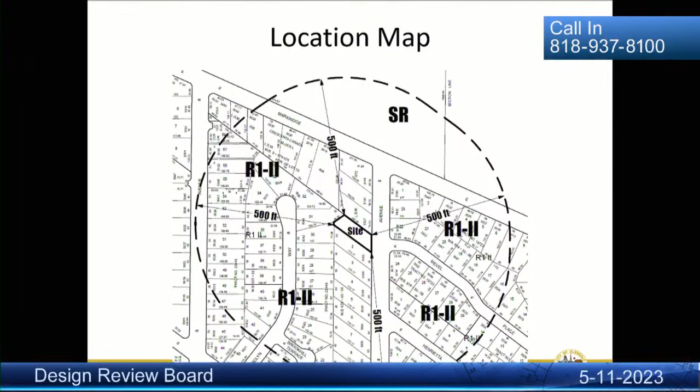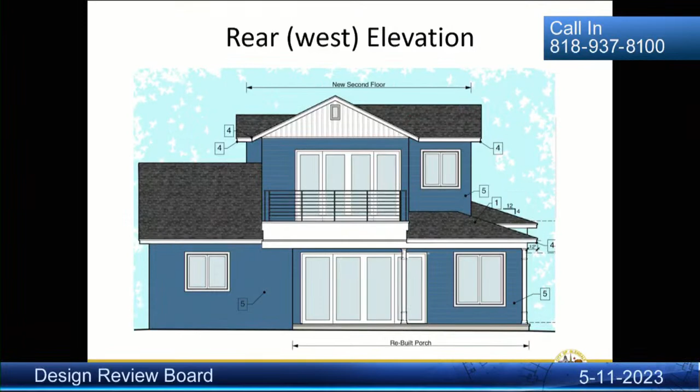Okay. The front elevation of the house, looking from Dunsmore, you can see the garage sort of outlined. The rear elevation and the two side elevations, the north elevation and the south elevation. And again, on this elevation, you can see the garage outlined. It is not being touched as a result of the project.

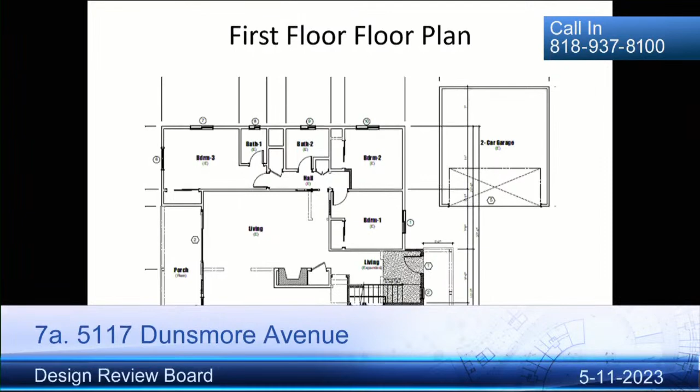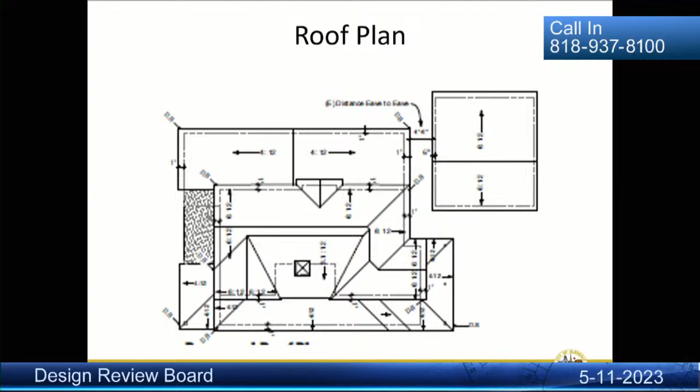A rendering of the proposed design. The floor plan. This floor plan, the darkened area is the square footage addition on the first floor. So you can see they're adding to their entry, they're adding some space for stairs and then a laundry room. This is the new second floor. Roof plan. Garage elevations, again, this is not being touched.

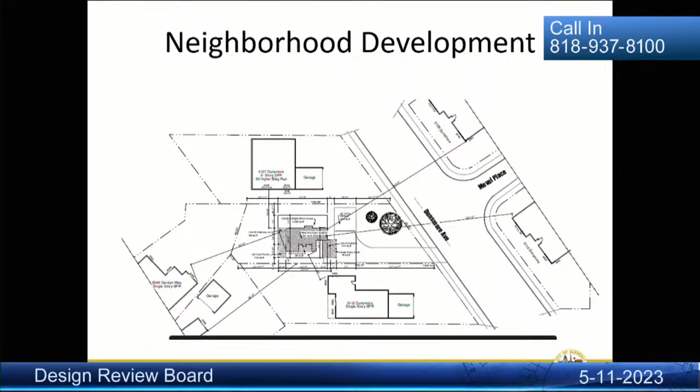Some section drawings. This is sort of the proposed residence in the center, and then the surrounding development, the surrounding houses are off above and below and to the side. So this gives you kind of a relationship. Material board, and then we have some conditions. So let me step back to the front of the PowerPoint.

The site planning of the project is acceptable. The addition really does not change the site planning in any significant manner. The side-loaded garage, as I mentioned before, is not being touched. There is a small addition at the front which expands the entryway and allows for the staircase to the proposed second floor. But really, other than that, the site planning is similar to what's existing now.

I would like to call out a correction in the staff report. Staff proposed initially a condition to remove or modify the existing wall and fence, which is located along the south property line. And this needed to be removed or modified to comply with zoning standards. However, there is a note called out on the plans that said this wall/fence will be removed. So that condition is no longer needed.

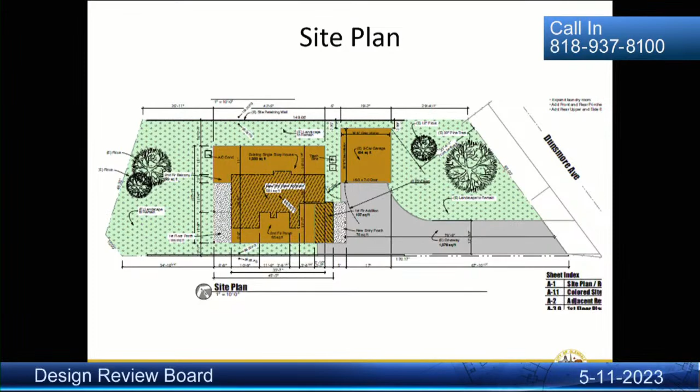So similarly, the mass and scale of the project is appropriate. Again, this is the front elevation. The site already contains a graded pad, and there are no changes to the size of this pad. While the neighborhood contains primarily one-story homes, and you can see that in the neighborhood survey, the proposed addition to the subject residence is really set in from the first level, and you can see that on the elevation pretty clearly. And also, the house is really set back from the street. The garage, as I mentioned before, is between the street and the house. Finally, the proposed covered porch highlights the front entry to the home without making it monumental.

Staff is suggesting a couple changes to the design and detailing of the residence. At the covered porch, the proposed columns appear a little bit spindly, and staff is recommending the addition of a fourth column or beefing up the columns that are proposed to make them appear like they are providing more support for the roof element.

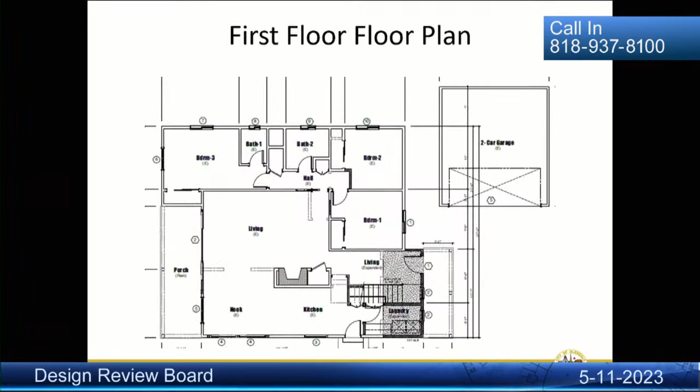Additionally, staff is recommending reducing the sizes of the proposed balcony and porch accessed off the primary bedroom to less than 25 square feet and/or requiring landscaping to be installed adjacent to those areas to provide some buffering to adjacent neighbors. And let me scroll down to the second floor plan, so that you all can see what I'm talking about.

There is a proposed balcony to the west, and there's a proposed porch to the south. Both are over 25 square feet, and as you know, city standards require us to look at privacy concerns with balconies and porches over 25 square feet. So we have suggested a condition either to reduce the sizes of those features or add landscaping, which would allow some buffering and some privacy for adjacent neighbors.

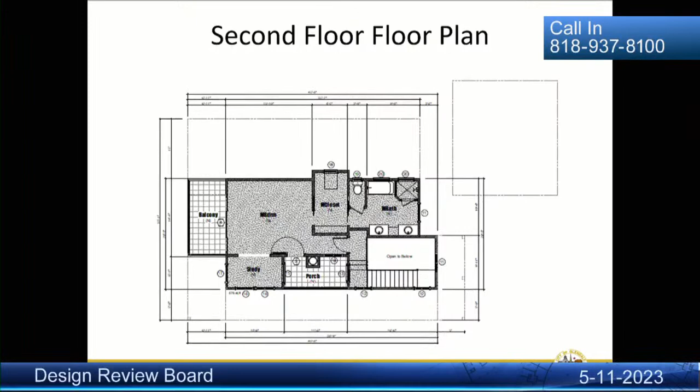We did receive one letter expressing some view concerns. I think that was forwarded to you. The gentleman was basically supportive of the project, but more concerned that the city didn't really have view protection. Additionally, the applicant recently submitted plans with neighborhood signatures that are in support of the project. So I'll hand those over to you, but other than that, that concludes my presentation. Staff is recommending approval of the project with 3 conditions contained in the staff report, and as I said earlier, we can eliminate the 3rd condition regarding the fence wall.

Great, thank you. Mr. Kiesel, do we have any questions? Yes, Mr. Keiser, can you leave up the rendering as we go through deliberation? Sure. Thank you.

Thank you. Any other questions for staff? Yeah, I had another question. So just to be clear, because I don't see it in the conditions in the staff report, but you said that there should be a condition about privacy, reducing the balcony sizes or adding privacy. Condition 2 suggests, and I'll just read it, the second floor balcony and porch shall be reduced in size to less than 25 square feet.

That's not what I see. That's not in our... Did we do? No. Okay. I apologize for that. What we sometimes do with potential privacy is just, I'll bring it to your attention. And often, if you don't hear from any neighbors, we think maybe there isn't an issue, but if you thought there was, you might propose buffering or something. Okay, all right. I just wanted clarification on that. So, yeah, okay. I'm sorry about that. Actually, you have the correct conditions in your staff report.

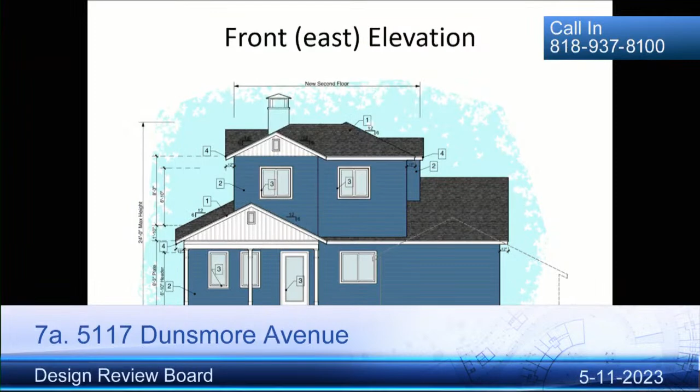That is, I believe that is just the remainder, one second. Just from a balanced design perspective, it just seemed a little thin to me. That's all I'm saying. It was actually my way of breaking the facade at that point, the stacking. I understand. If it bothers you, we could take it out, but it was my intent of breaking the vertical plane.

All right. I just wanted to ask if you'd considered it. Yeah, okay. I think it's so far back and it's behind the garage that it was more important to me to make it feel like it had always been a two-story. Yeah, okay. Thank you.

Okay, any other questions for Mr. Giragos? Nope. Okay, thank you, Mr. Giragos. We have no other cards here for this case. Do we have any callers? We have one caller. Okay. Or did you want to speak? No.

Mr. Michael Weber, you're live on the air with the Design Review Board. Yeah, thank you very much. Michael Webster. Oh, I'm sorry. Thank you for reading my letter. Just a point of clarification: we have dear neighbors, we do support their desire to build, and they do need to expand for their family. A comment was made that we supported the project. In my letter, I didn't support nor oppose the project.

Want to be clear. I was disappointed with the comments of the architect that the neighbor to the south has impact, but really the neighbor to the north does have impact on the view, and really gets to the fact that Glendale has completely inadequate view laws. But it is what it is, and we just wanted to make sure we were heard. Thank you. Do you have any other comments? That concludes my comment. Thank you.

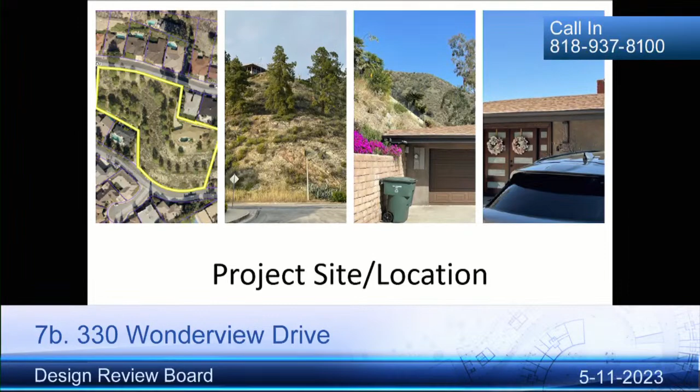I tried to consolidate so I don't have that many slides, just to work quickly through the presentation and have the opportunity for the applicant and the public to speak. So I'll go quickly. I've already described a little bit of the site in terms of its size, the zone, frontages on Wonderview Drive and Maginn Drive. Maginn is at the bottom of the site, but it is considered a dual frontage.

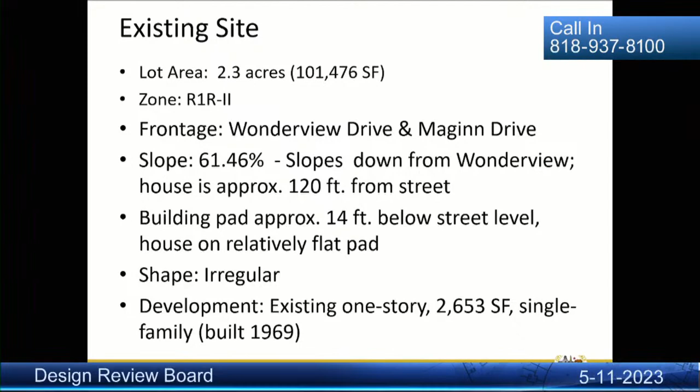We've talked about the average current slope, and how it slopes down from Wonderview Drive, approximately 120 feet from the street. The building pad is approximately 14 feet below street level, and the house is on a relatively flat pad, and we discussed the existing single-family house. The project proposal is to demolish the existing house. They're proposing a new two-story, 5,919 square foot single-family house with a three-car attached garage.

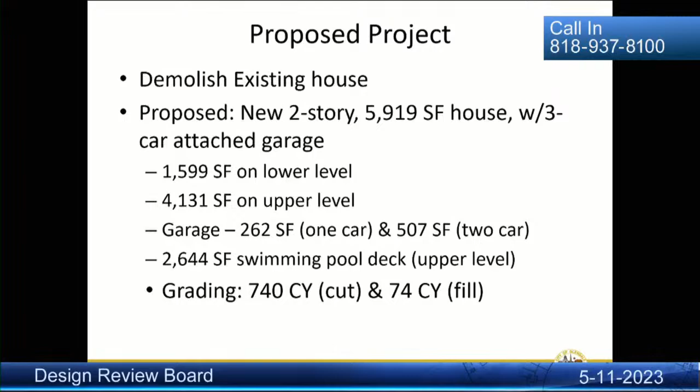The lower level will have approximately 1,599 square feet, and the upper level will be approximately 4,100 square feet. The garage is divided into a one-car and then a two-car, both attached. And there is a swimming pool deck proposed on the upper level, approximately 2,600 square feet, and they are proposing to grade 740 cubic yards of cut and 74 cubic yards of fill.

Project is exempt from CEQA review. It involves the new construction of a new house, and the existing house is not eligible for designation as a historic resource. In terms of context, the house has this long driveway, approximately 100 feet deep from the street, from Wonderview Drive, and slopes towards the south. And there are two single-family homes, one-story development directly in front of the subject site, adjacent to the property.

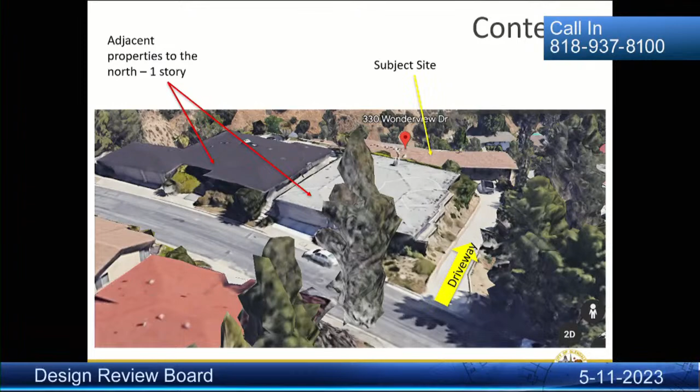And this is another view. Aerial views are probably the best view to capture the context. This image here, again, shows the existing house. It has the motor court and the swimming pool in the back, and then it slopes down. And then the rear of the property is where the pool is on the other image, and then the homes directly in front of the subject site.

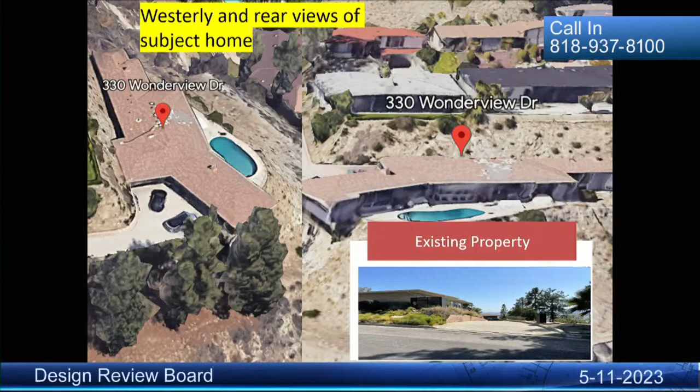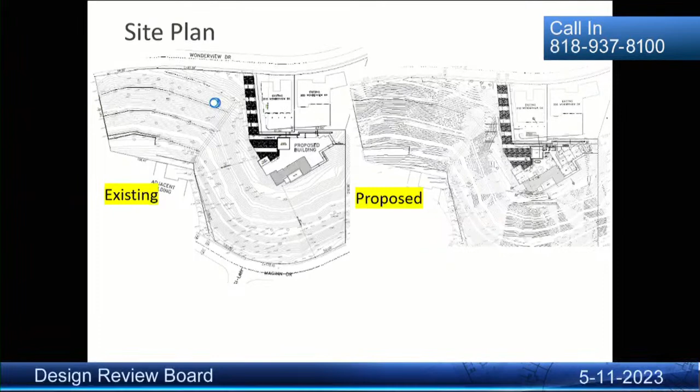And then the lower picture represents the image viewed from the street. So you'll have a glimpse of the existing house. And then the remainder just to the right of the property is part of the subject site, which has quite a large frontage. Again, the site plan is basically what I just described, so I won't go into too much detail on that. And the floor plans with the roof plan.

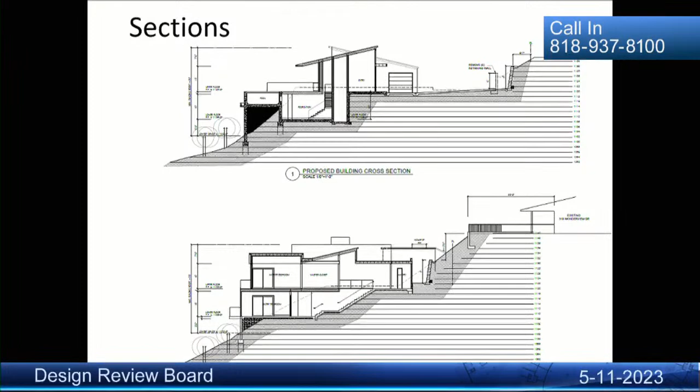Let me continue moving on to the next image. Again, more sections of the building. And the overall height is 2 stories and 35 feet, in case I haven't mentioned that before. Another thing regarding site planning, and let me go to that image real quick. We're suggesting condition number 2 to reduce the width of the driveway as much as possible while still in compliance with the 10-foot minimum width required by the zoning code.

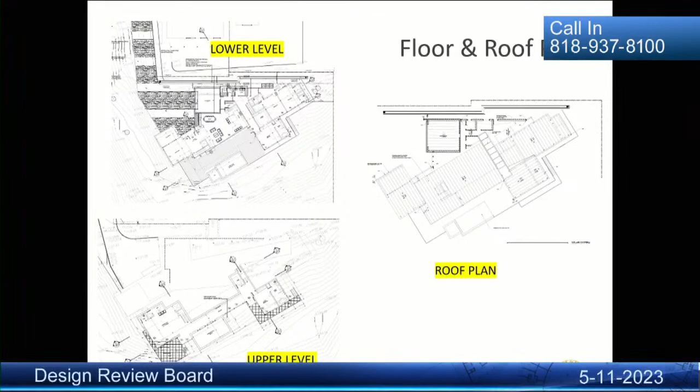Again, in its current form, it seems a pretty subtle driveway. It seems to flow nicely. Continuing that same thing, we believe, would be appropriate. In addition to that, if their intent is to enhance the existing design of the driveway, that's certainly something that would work well. But rather than increasing the width, we suggest that reducing it to approximately 10 feet would be more appropriate. And again, we'd like to reduce the amount of paving as much as possible.

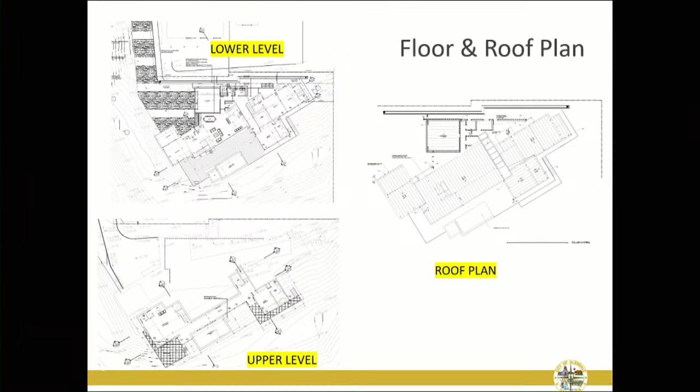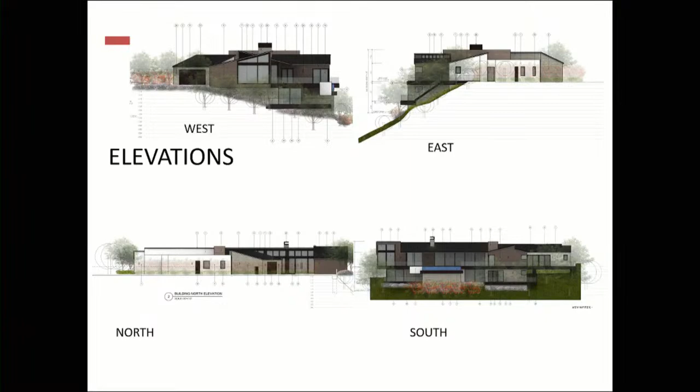These are some renderings or image elevations of what the house would look like. So there is some visibility, but not too much visibility from Wonderview. As you continue on Wonderview across the bend, of course, you will see the house more from a distance. And then from the street below, there will be some visibility, but quite a ways, more than 100 feet away. And these are some renderings of the front entry and the rear view of the house as proposed, and the color, materials and finishes that the applicant is requesting.

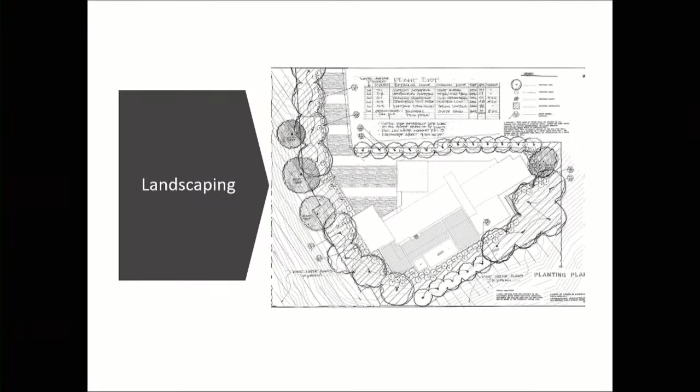And then the last condition has to do with light fixtures, just to reduce the number of fixtures, limiting them to locations of entries, the front entry and side entries, etc. And they are proposing to landscape right around the building footprint. And the 3 conditions that we discussed. So staff is recommending approval with 3 conditions.

We did receive 1 letter, email correspondence, which you received. There were some concerns raised by one of the neighbors. No, wait, I'm sorry, I take that back. I did not receive any email correspondence. I was thinking of the other project, yes. Same applicant, different project.

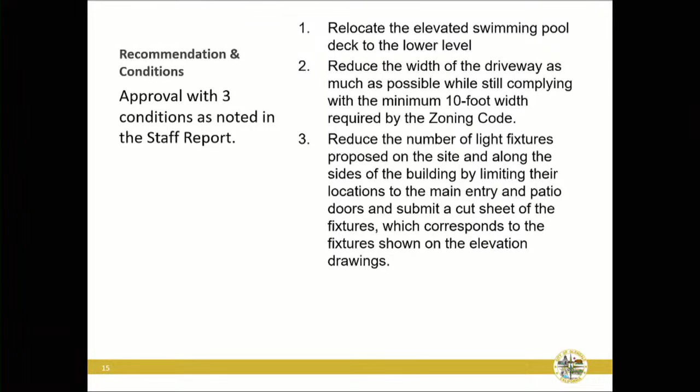So with that, one highlight I wanted to bring up is that many years ago, not this particular case in front of you, but a previous rendition of a proposal on that property was presented to the board, but I don't believe they ever pulled building permits, so it expired. Their design review approval expired after 2 years. So this is a completely different project. So with that, I will conclude my remarks. If you have any questions, I am available.

Great, thank you. Do we have any questions? Yes. Just one clarification. For the maximum height for a retaining wall, I just want to be clear, 15 feet is supposed to be the maximum, correct?

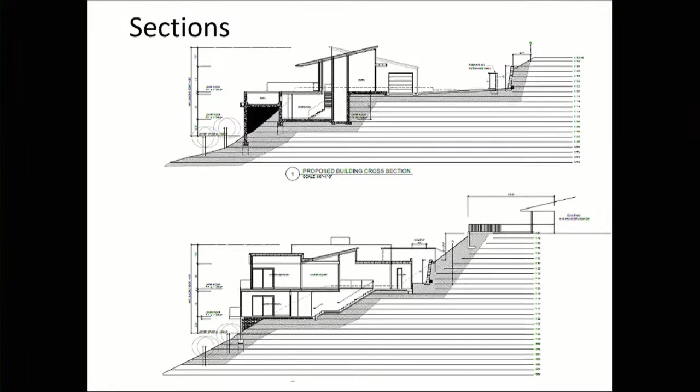I'd have to zoom in on one of my images here, but I want to say it's about 7 to 11 feet. I have to look it up just to make sure, maybe in the report. So the 15-foot height would not work in this case because it's not being screened by the primary building. In essence, it would be screened by maybe the adjacent home, but that's not the way it would work with the code. Okay. Any other questions for staff?

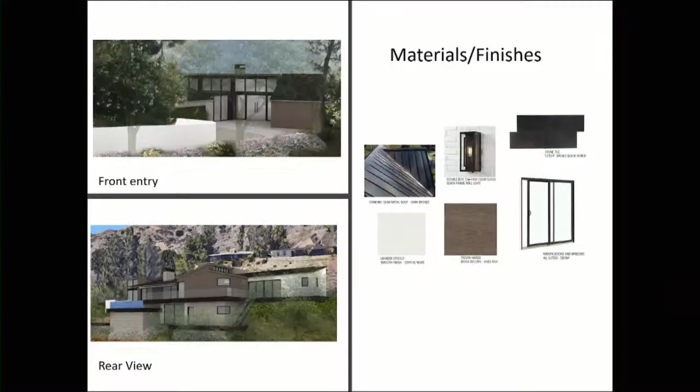Yeah, the other condition about lowering the pool height, is the primary concern the height of that retaining wall at the base of it? Is that the concern? The mass, no, because essentially that wall is part of the building, right? It's more of the building mass that's created as a result of that feature. So maybe showing the rendering that's in front of you on the lower left corner here, we can see that pool deck that rises up sort of like a block, if you will. So it's not a separate retaining wall. It's all integrated as part of the building. So it's still part of the building mass.

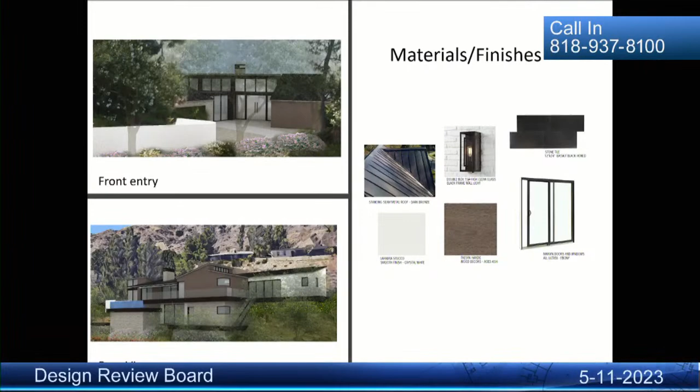So it's just that, again, that volume seems kind of blocky, and for that reason, we're suggesting that softening that facade while at the same time not creating that backfill condition, which they're doing, would be more in keeping with the guidelines. Thank you. And because it's on the downslope side, the height, it's not being considered a retaining wall. That's why the height's not an issue. It's part of the building.

Right. Understood. Right, if this were part of the building with habitable space behind it, it would be broken up with windows, maybe a balcony railing or something. It would be a very different feature. Where here it feels like a big retaining wall that we normally would avoid, but technically it's not a retaining wall, so that's why we're bringing it to your attention. And also, there are 2 decks on the house, and we can't tell people how they want to use their property, but there is a deck that could serve as a very nice pool deck at the lower level also, if it were dropped.

Okay. Any other questions? No? All right, thank you, Milka. We could invite the architect to come on up, Mr. Zorabians. Yes, good evening, Madam Chair and members of the board. My name is Hamlet Zorabians, and I'm the project architect on this project.

And as you know, there's different circumstances, different features to any site. So no 2 sites are the same at all times. So you cannot uniformly apply a code that has a different intention to it. So this particular site is very unique. And so when we approached the planning of it, the very first thing that we did, we looked at the building and we saw two adjacent neighbors to the north. And so what would you do? I mean, you cannot resolve this thing in a one-story building. So you had to have another level.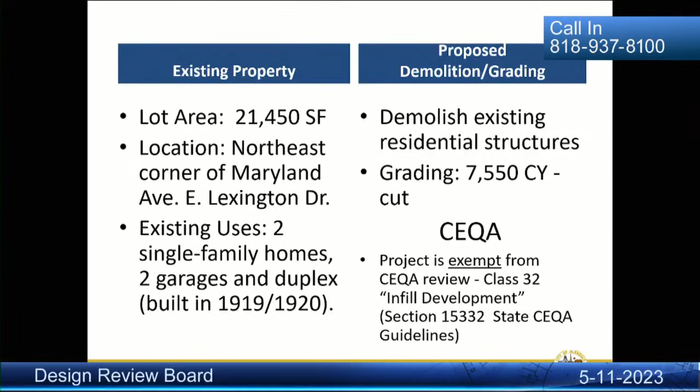And there are existing residential uses on the site, including 2 single-family homes, garages, and a duplex, built between 1919 and 1920. The project proposes to demolish those existing structures, and the project is exempt from CEQA under a Class 32 infill. A little bit of history on the project is that there's already been a density bonus approval with an affordable housing component, inclusionary housing, approved for this project.

I'll briefly go over that a little further in my presentation as it relates to the concessions that were already approved for this project. So again, we're dealing with a multifamily affordable housing density bonus with an affordable housing component. The proposal is to construct a new 4-story multifamily building with a density of 28 residential units. Floor area is approximately 34,900. And again, the density bonus request with an affordable housing component was already approved back in July of 2022.

At least 15% of the base number of units are being reserved for very low income households, which equates to 4 restricted to very low income households. And the 3 concessions that were already approved for the project included an increase in the maximum allowable building height. So their height is proposed at 4 stories with a 52-foot overall height for the project. The increase of maximum FAR, floor area ratio, was another concession, and the project is proposing FAR at 1.63. And the third concession that was approved was to reduce the common open space by approximately 2,600 square feet.

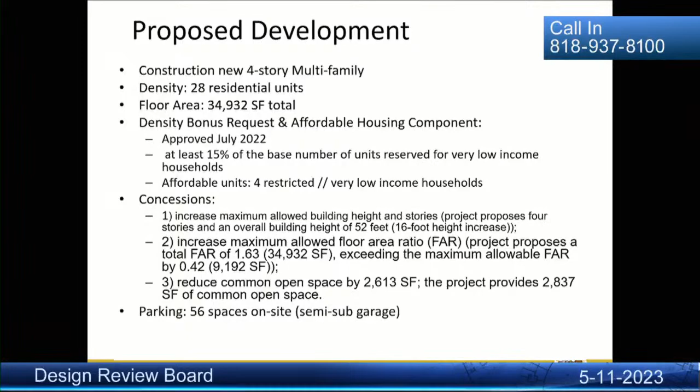The project provides, reduced the common open space by 2,600 square feet. It's providing 2,837 square feet of open space, and they're providing 56 parking spaces in a semi-sub parking garage, or I should say underground parking garage. These are a few pictures of the subject site and some aerial views of the location of the property on the lower right-hand side of your screen.

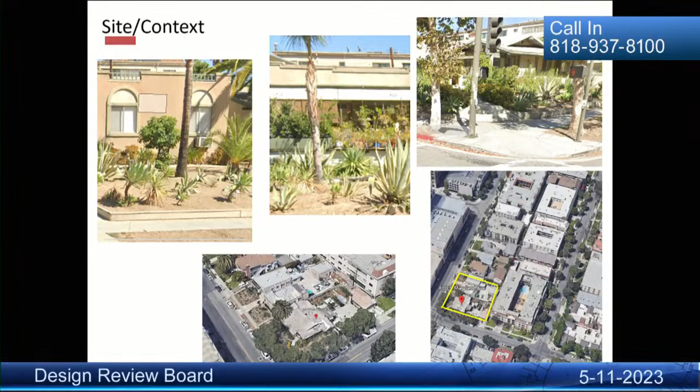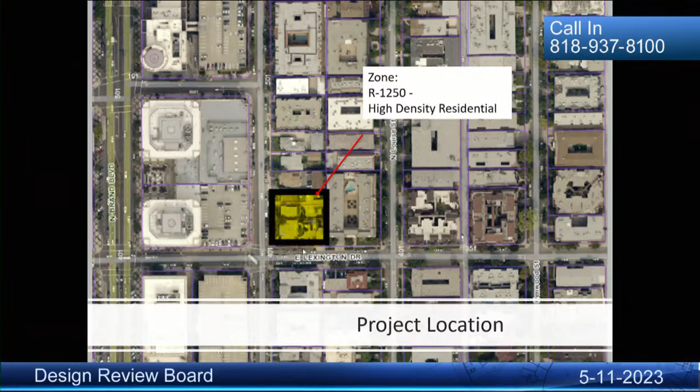And to the north, there's a 2-story multifamily building. And immediately adjacent to the east, this building here, I believe, is a 3-story multifamily building. And then we also have 2- and 3-story buildings across the street along Lexington Drive. So with that, I will continue moving on with the elevations for the project. Let me briefly go over some of staff comments, and then again, the applicants are here so they can dive further

into what they're proposing. So some areas of focus that we're suggesting for the board to consider was to lower the height of the ground planter walls as much as possible. They are proposing planter walls on the street-facing facades. Maybe the applicant can correct me, they're definitely outside the setback area, but they're approximately 3 feet or so in overall height. So we're suggesting to reduce those to open it more at a pedestrian level. The next comment is more of a general comment regarding gutters and downspouts to be painted to match the adjacent wall color.

Number 3 has to do with any utility connections like backflow. That's more of a zoning item, but again, since we're considering site planning and landscaping, something to consider: to make sure, to the extent possible, that it doesn't exceed the maximum allowable height of 24 inches if it's in the setback, and 2, to incorporate landscape to the greatest extent possible in those areas.

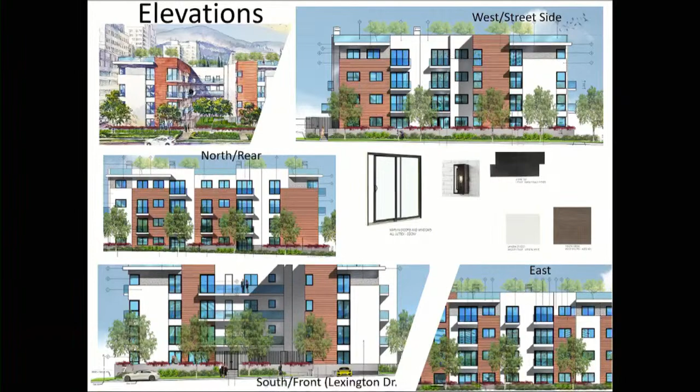Okay, and then the last three comments: again, the light fixtures to be clearly shown, and again, limited to the main entry and patio doors.

More generic conditions about providing more details. That's for number 6, of all junctions of when different materials intersect. And the last one was to provide sections, window sections, and window schedule, consistent with our handout.

That concludes my presentation, but before I forget, we did have one letter. That was the email correspondence that I had forwarded to the board in advance, and that's all I've received thus far. And with that, I'll conclude my remarks. Thank you. Yes, Mr. Simonian.

Yes, I do have a question for staff. So on sheet A 2.1, which is the first sheet on our printouts, is the middle courtyard portion considered additional open space? Correct. I see. And so the additional open space, because I was trying to read along on the density bonus staff report, Exhibit 5.

And so the additional open space is per code, but the applicant is requesting a reduction of the common open space to the 100, 200 square foot per unit for the first 25 units, et cetera. Yes. That's the common open space regulation that the applicant was granted a concession for. Understood. Whereas the additional common open space is fully provided in the courtyard. Right, yes.

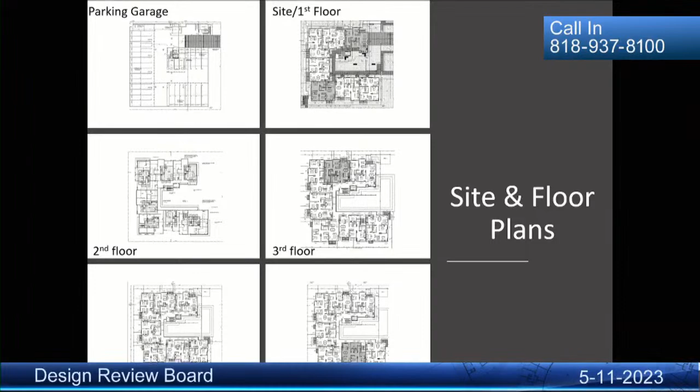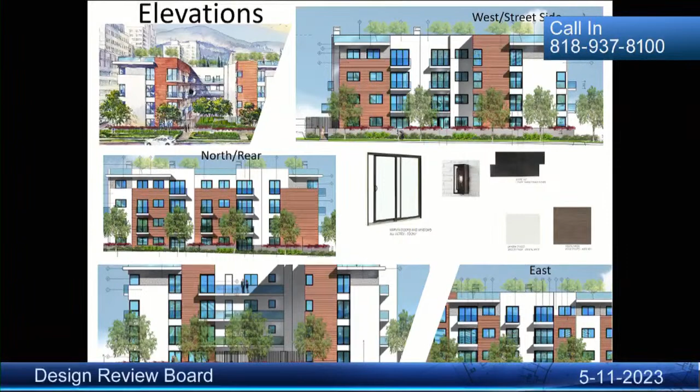Also, when we're looking at the building elevations, the east elevation, which is facing the building to the east, the balconies have glass railings, which are, of course, very nice. They're very expensive. They're of high caliber. But if you actually have non-glass railings, in essence, it's not as intrusive, because they won't see into your property, you won't see into them, or if someone's sitting out there, they're not worrying about it being reflective. So it's a consideration. I wanted to get your thoughts on it.

And again, the glass is much more of an expensive material to put in. You've kind of gone beyond expectations, but it's a thought. So those were just some things I wanted to get your thoughts on, based on the amount of people that are sitting here. But it's important, I think, to point out that he's way beyond the setback. Those were some things I wanted to get your thoughts on before we get to the deliberation part.

Okay. I'll be open to that suggestion. The reason that we use glass here is to introduce different heights to the building, where certain elements are coming together, and the glass being invisible gives that notion that some portion of it is higher, some portion is lower, not to have just a flat roof there. And when it's a modern or contemporary building, it's difficult to see this in two dimensions. Right. But when you go to 3D, it's much easier to see what we're talking about.

That's the only intention. If you feel that we can do that, we can go back and do railings there. Being downtown, being modern, we wanted to do it this way, but I'll be open to that. If you want to put a consideration or something, then we can think about it. It's a discussion. So I'm saying, just on the east side, it would really, I think, alleviate some of their concerns, the neighborly concerns.

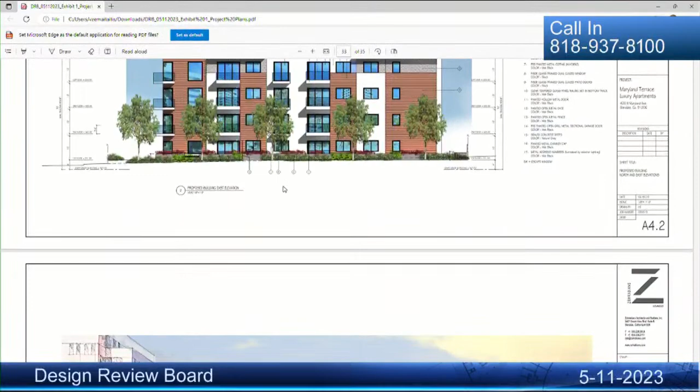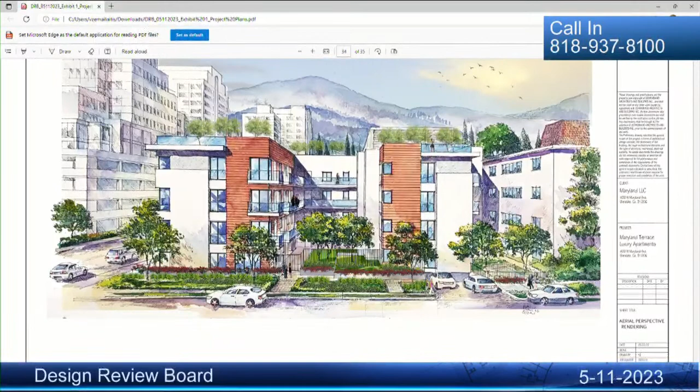And so if the balconies were relocated to the corner there, where the mouse is, not only would it provide the opportunity to have that stone more prevalent, but at the same time, it almost would provide a differentiation of the base as well, because then you would have a balcony providing a differentiation at the corner, and so we're fulfilling different goals at the same time. So I do think that's a good idea.

And the railings, as a consideration, I think since it's beyond the setback, I don't really want to dwell on it too much, but I think at the end you may decide to do that anyways, because it might be a good thing for your tenants as well. And I think those minor changes will have a huge impact on the building to the east as far as privacy is concerned. And so I support the project. I think it's well thought out.

And I think staff has made some really good comments as to how it could be improved. That's gotten us to echo them and to discuss further. And that's what this process is all about. And so I do support the project with those conditions. And we could also discuss some other items as they come up. Thank you, Madam Chair. Great. Thank you, Mr. Simonian.

So I agree with my fellow board members, and I also am in support of the project, and I won't reiterate everything that was said, but hopefully the neighbors could understand that our hands are tied, as Mr. Welsh said, with projects of this nature. And really, I do appreciate Mr. Zarabian did go ahead and take your building into consideration by providing more of a setback than he had to. We've had a lot of projects come to our board where it's only been 6 feet away from the property line, and there have been buildings right there.